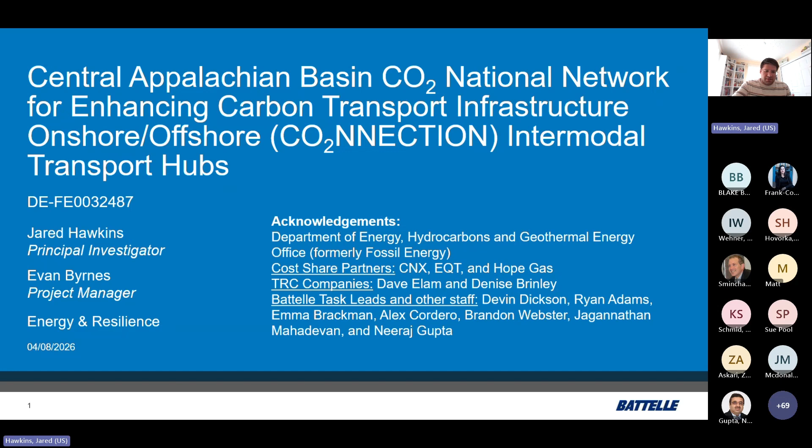So the agenda for my talk today is just kind of giving you background and the location, as well as our thinking of why we proposed this project. We'll go through the conceptual design for the project, including the scenario development that we used to come up with a realistic pre-FEED scenario, some of the project assumptions, the regional connections that will be needed, our permitting and regulatory assessment, the business case analysis, environmental health and safety risk assessment, and then finally we'll round it out with some key findings.

So the project background, essentially why the Central Appalachian Basin? Well, there are basically two prongs of reasons as to why we chose this area. First of all, it's a really important industrial area where there are sources of varying sizes and purities. We've got everything from natural gas processing to steel plants, chemical plants, refineries, electric power plants, and most of the things in between. In addition, we've got some challenging storage prospects.

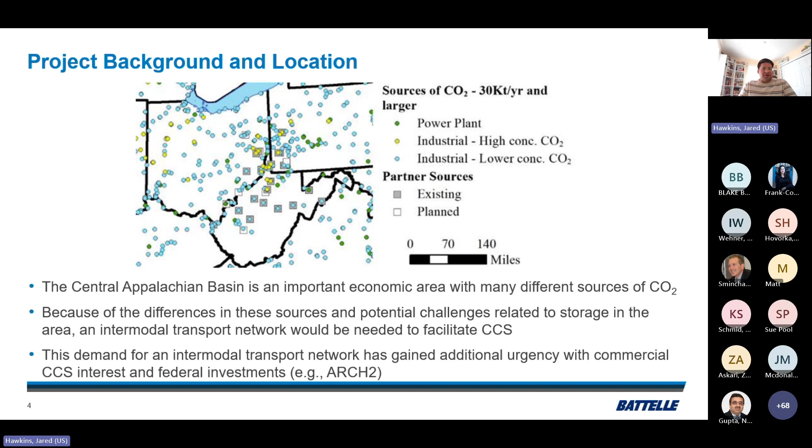There are some promising ones, particularly in the Cambro-Ordovician and some of the younger sediments in Pennsylvania and West Virginia, but these largely need some additional work to kind of prove them up. And so combining those two things with the fact that there is expected to be some demand for CCS prospects as the ARCH2 program starts ramping up, we decided that this would be an interesting area to look into for intermodal transport in particular.

So during this presentation and the report that resulted from this work, we basically discussed two different levels of the project. The first was the hub-wide level, where we had two different conceptual scenarios. One of our scenarios used existing sources of various sizes, mostly natural gas processing and gathering and booster stations. And the other layered in a newly built hydrogen plant. And this was to simulate essentially what the ARCH2 project would do to the region after an intermodal transport hub was completed.

So essentially what layering in that additional CO₂, that additional fairly large source, will do to the overall development of the scenario. And then finally, our second scenario was zooming in on a specific node within the hub to actually complete the pre-FEED concepts. So the conceptual scenarios are where we actually look at what makes sense to transport, how and where. So this is where our mode selection is, whether we're using truck, rail, or pipeline, as well as where our gathering points are.

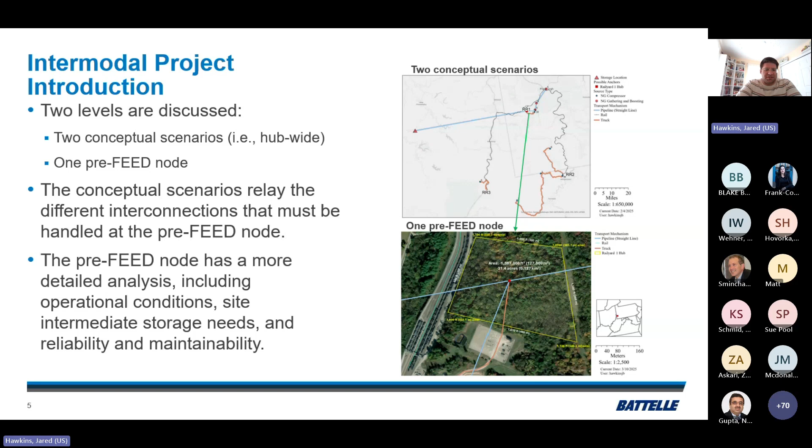And then the pre-FEED node for the more detailed analysis was actually selected in Washington County, Pennsylvania. And the reason that we selected this specific location is because it was the only location within our overall concepts where all three modes of transport came together in one area. So it was where we selected as the most interesting area, where we're going to have a bunch of different types of interconnections and we'll have to deal with CO₂ coming in at various pressures and on various modes.

So the conceptual site development, starting with those high level sources and sinks, essentially we developed what I call anonymized sources, which are of similar sizes and types to the sources that are in the area. I mentioned natural gas compressors and gathering and boosting stations. With the development of the Marcellus and Utica, those types of sources have kind of exploded in the area. So we selected those as what our realistic existing sources would be.

The sinks that we identified were all based on either work that we had done previously at Battelle and other DOE sponsored work, as well as some publicly announced CCS projects that are in the area. And we really focused in on the sink labeled S2 here as one of the more promising ones that we had studied in the past, and one in which we found that a commercial scale project was feasible.

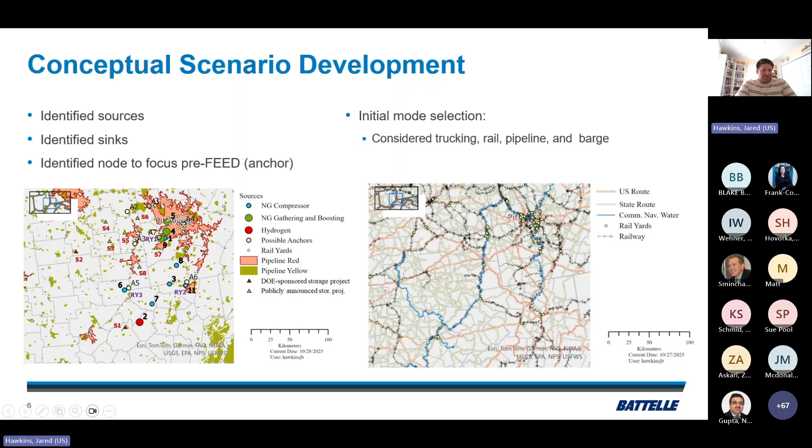So for our mode selection, we actually made a series of decision trees. The first input is the distance from the source you're considering to the next node. The second is the volume you're transporting. We had an ease of pipeline construction, which considered where the source was located relative to sensitive areas in particular. The distance to rail yards is an important consideration when you're thinking about transporting via rail. And then finally, we wanted to prevent any disruptions to local traffic patterns.

So we did this by considering the distance of the source to a major highway. We didn't want to send a bunch of trucks through a small town downtown, or send a bunch of trucks on a residential road, or a smaller rural highway. Instead, we were focused more on the state highways and obviously the interstates.

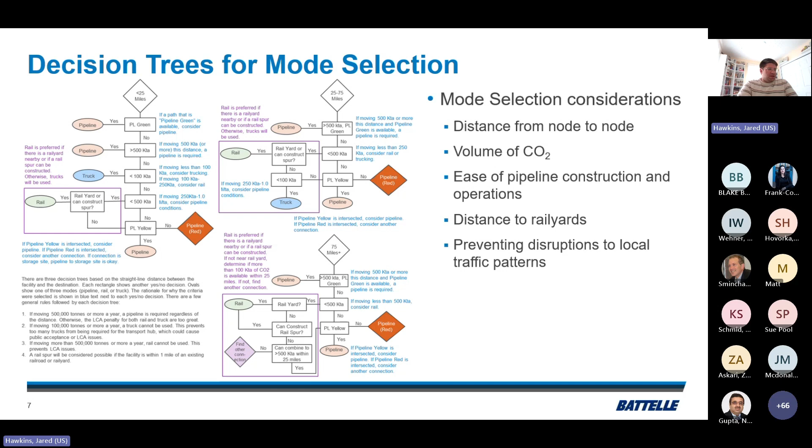So the two scenarios here are designed to deliver an average of around 4,400 metric tons of CO₂ a day to the storage facility in Tuscarawas, Ohio. And I just have a few animations here to kind of walk through some of the findings.

First of all, we focused on natural gas sources for the existing anonymized sources. The three different transport modes, as I covered earlier, are represented here. Black is rail, the peach color is truck, and then blue is pipeline.

Trucks are handling the shorter distances, particularly in this anonymized existing scenario. There's a few truck routes that are delivering CO₂ to rail yards, and one that is delivering it directly to the pre-feed node that's in Washington County here.

The trains are handling the medium distances and volumes. So if you consider this rail yard down here where you see the 11, there are a number of different smaller sources that are pooling and combining here and then transporting up to the pre-feed node where the pipeline and another rail yard are also coming in. And then finally the pipeline is handling the larger volumes and the longer distances.

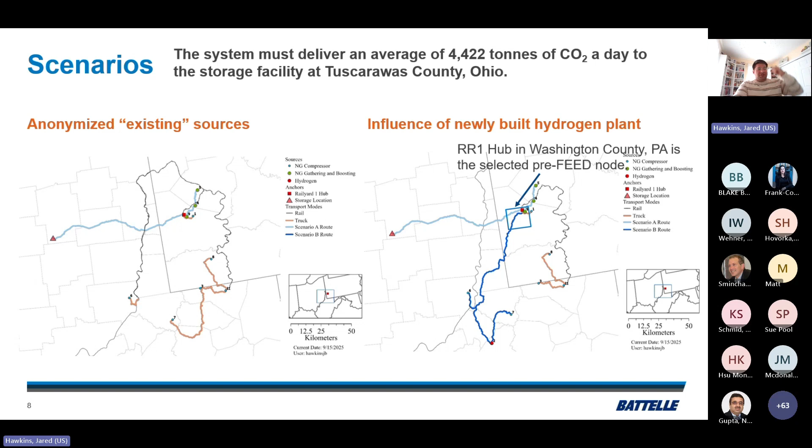And then this rail yard one hub, Washington County, PA pre-feed node, is where we're going next in the presentation. So some of the assumptions that we used for our pre-feed assessment was considering the transport only. So capture, we're assuming that the CO₂ plants are delivering their CO₂ to these specific nodes at the proper purity and initial compression for transport. Our study considers for truck and rail liquefaction and all intermediate storage, compression to pipeline specs as you're moving through pipelines, and then any interconnections between the modes, as well as actually executing the transport.

Once the CO₂ leaves the pipeline at the Eastern Ohio storage site, it's no longer a part of our study. So any intermediate storage or compression required for injection or the actual act of injecting is not really a part of our considerations.

We assumed a 2% total downtime for each of the capture plants, and we assigned these randomly. And this was used for flow assurance. So in other words, we assumed 1 week a year, each one of the sources at different times throughout the year would be offline and no longer delivering CO₂. This is not a huge deal if it's a smaller source, but it becomes a bigger deal as the sources are larger and larger. And this is used to simulate the variance in flow rates that are expected because of annual maintenance on the capture plants.

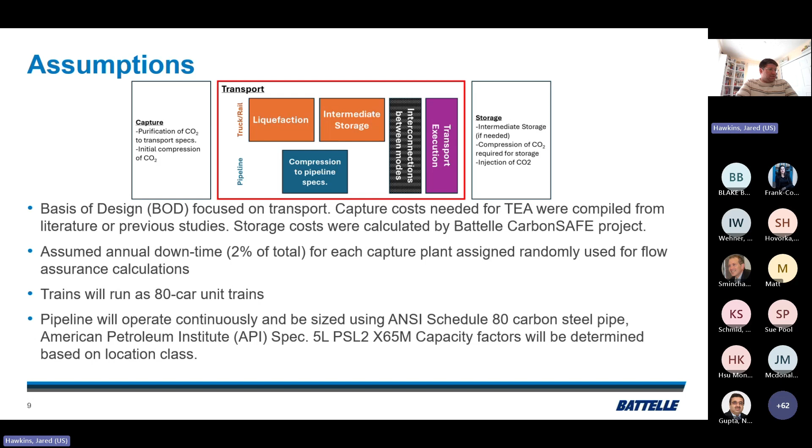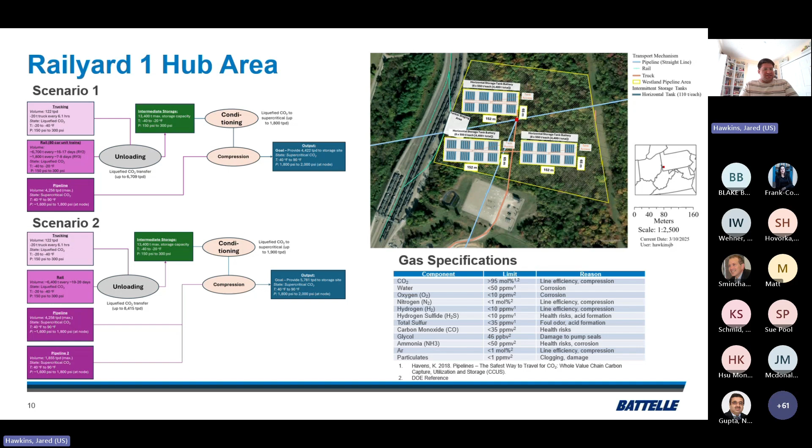And we wanted to maintain a fairly consistent flow rate in our pipeline. So as those trains are coming in, you need areas to store the excess CO₂. You also need to consider not dropping below a minimum flow rate of CO₂ when some of the larger sources go offline. So we found that this amount of above ground storage was needed to effectively maintain consistent flow rates of CO₂ in our project.

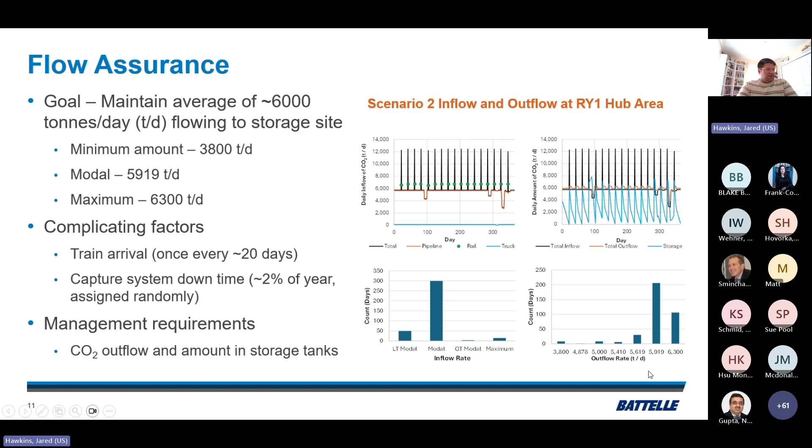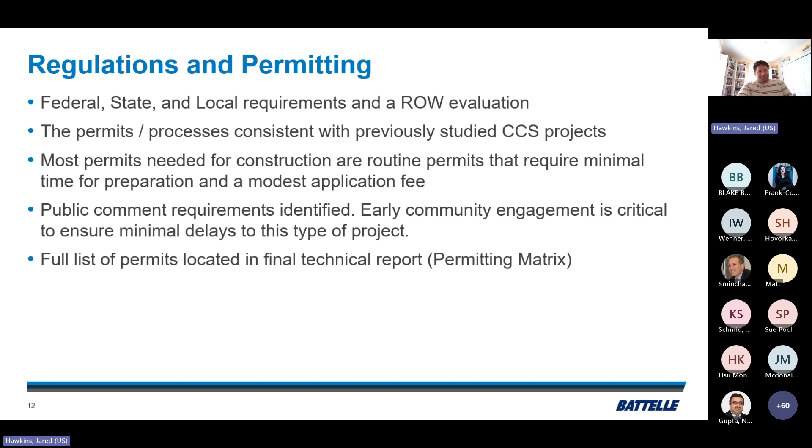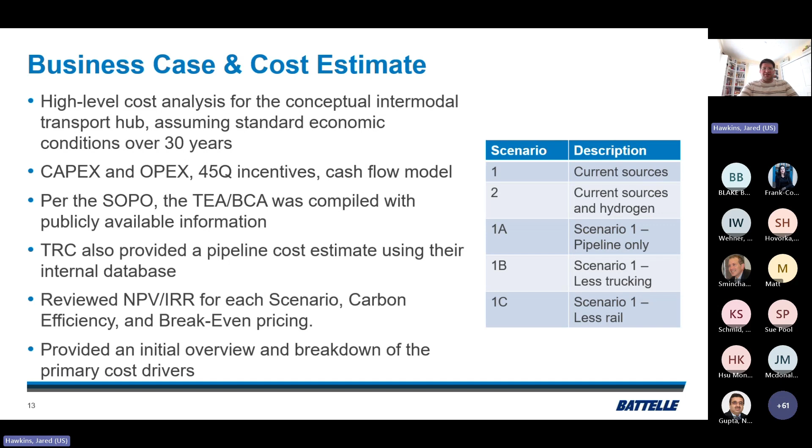We also had TRC Companies as a partner, and they have a very good internal database for estimating pipeline costs. So we took advantage of their database to compare to our assessment using public data. And then we reviewed the net present value and internal rate of return for each scenario, break-even pricing and carbon efficiency. And then, this is really considered an initial overview of the breakdown of the primary cost drivers. Obviously, this is a pre-FEED study, so it's not the final answer, but intended to kind of get us in the ballpark.

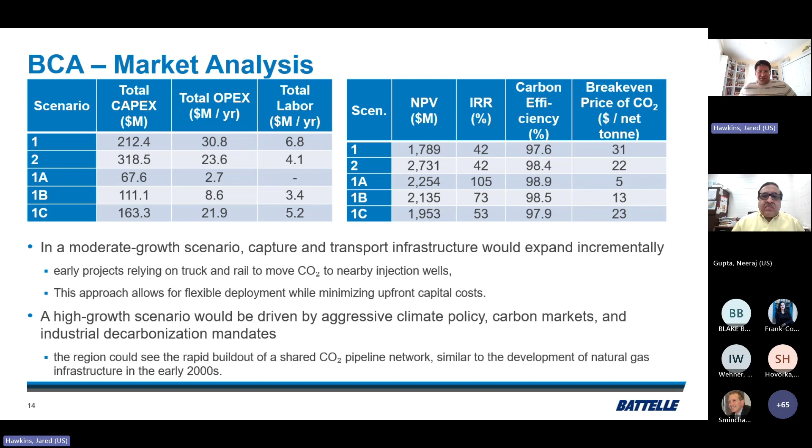Hey, Jared, can we maybe just quickly finish in a minute? Yep. Okay.

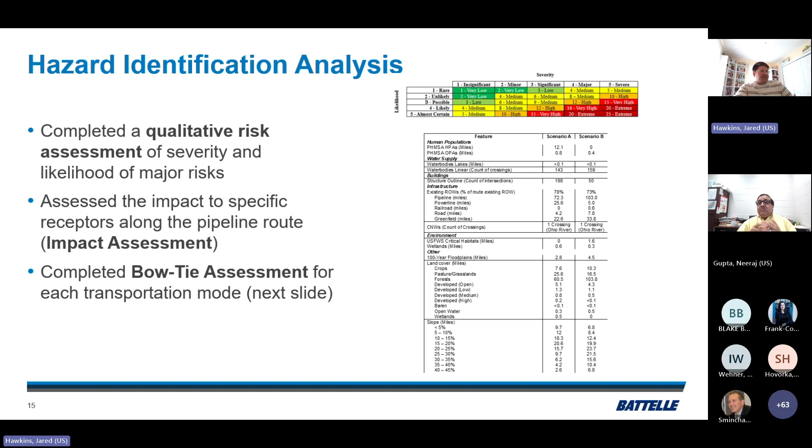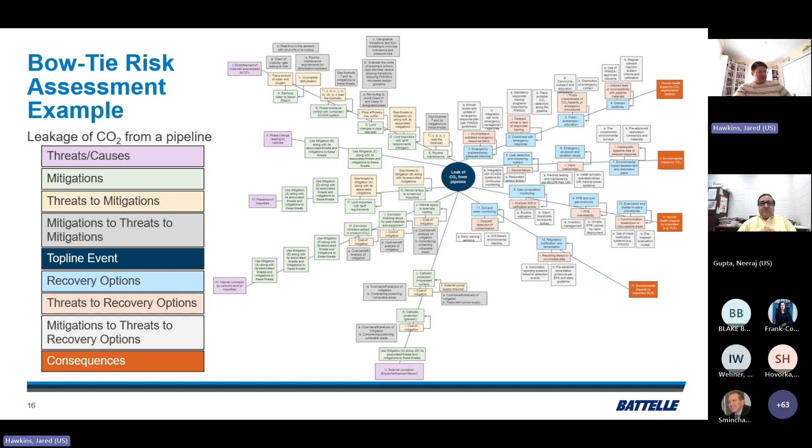Right. Sure. Thanks. So HAZID: we did a qualitative risk assessment. We did a roundtable for the impact assessment, and then a bow tie assessment where we identified our top line event as a leak of CO₂ from each of our three modes, and we identified some threats and causes, some consequences, mitigations, recovery options, and threats to these, and mitigations to the threats to those.

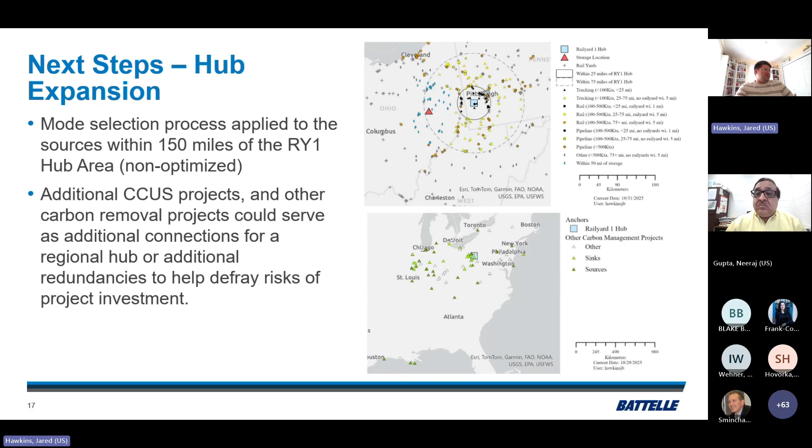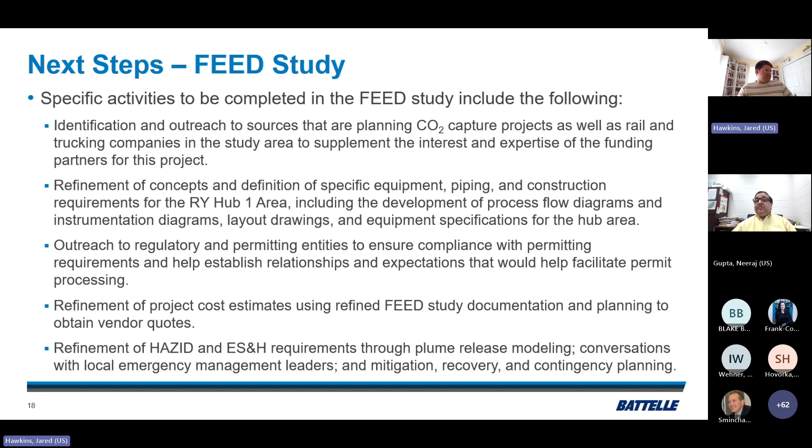So next steps is a FEED study. At this point we would be reaching out to additional sources that are planning capture projects, as well as rail and trucking companies to get more realistic information, refine the concept, and define some of the specific equipment. Obviously, outreach to the regulatory and permitting entities would be a pretty crucial part of the FEED study, and then refinement of the project costs and HAZID and environmental safety and health.